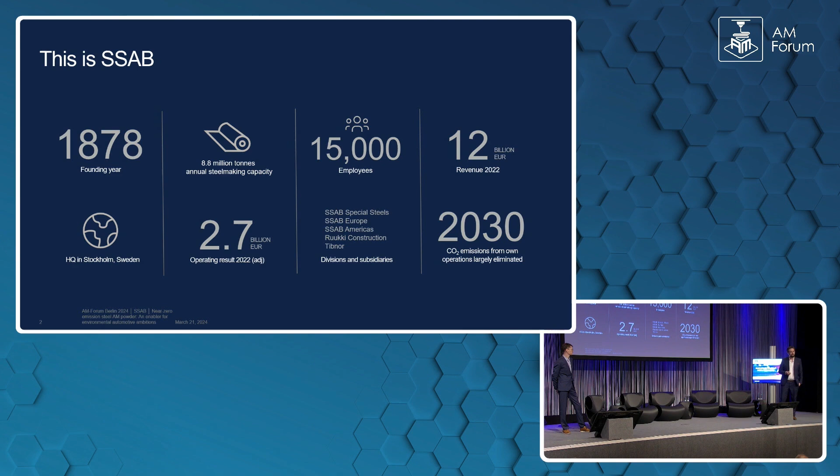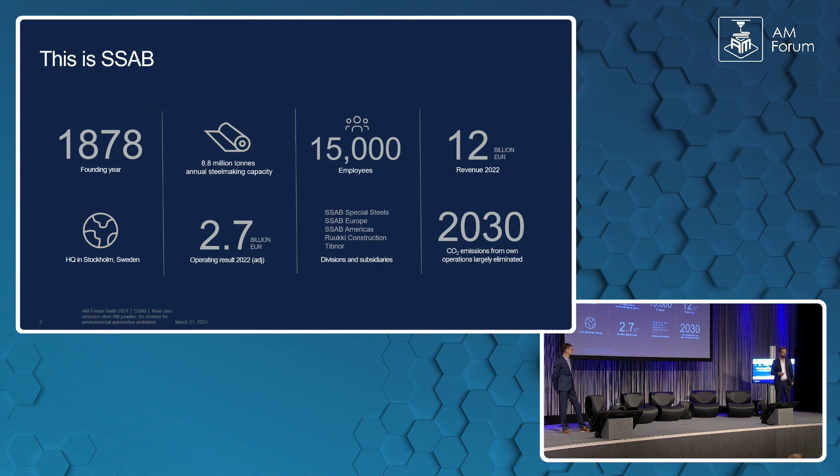SSAB, we're quite new in the powder business, so I just want to introduce us as a company. You can read the numbers, but what's important for us, Swedish company, HQ in Stockholm, Sweden, and we're aiming to be largely emission-free by 2030. Quite aggressive, I would say, and so far looking good.

That is, of course, with our products as well. That's why we have fossil-free steel and zero steel. The fossil-free steel is made from hydrogen-reduced iron ore, emitting only water, and the zero steel is made from scrap. The electricity is fossil-free, and the fuels are fossil-free.

Moving forward, this is our story in sustainability with steelmaking. In 2016, more or less, we started our venture together with LKAB and Vattenfall in Sweden. We started a new company called Hybrit, where we developed a new technology for reducing the iron ore. We announced that we were going to launch our fossil-free steel in 2026, but we did our first delivery in 2021, and in 2023, last year, we released our zero steel as well, which is emission-free scope 1 and 2.

This year, now, we're launching SSAB Zero and fossil-free for additive manufacturing, where the zero is scope 1, 2, 3, and the fossil-free 1, 2, which is quite important for our business. I will tell you a little bit about that later. And as I said previously, 2030, largely emission-free. Striving, going well.

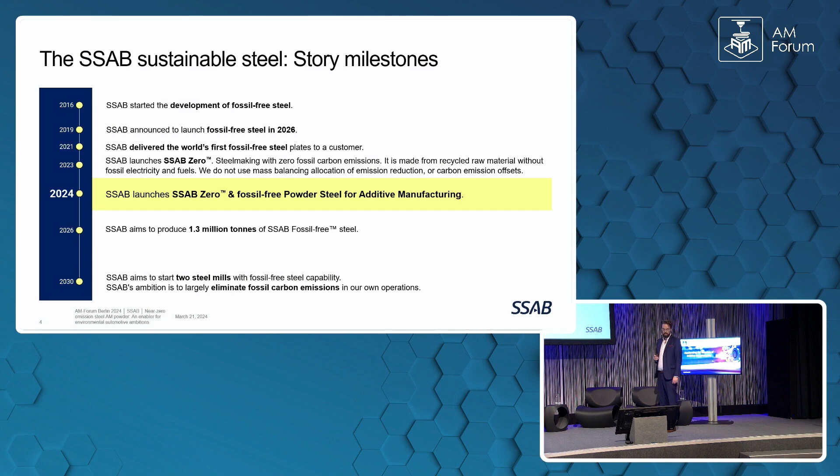Why do we do this Hybrit venture? We do this because we know recycling steel, scrap-based steel making will not be enough. We will not be able to meet the market demands. So we need to have this, and we're pushing the market. Why are we pushing the market? We're doing it because of the environment and the great peers we have within the industry, like Volvo, who's pushing us, of course. And that's why we have a great collaboration in this area.

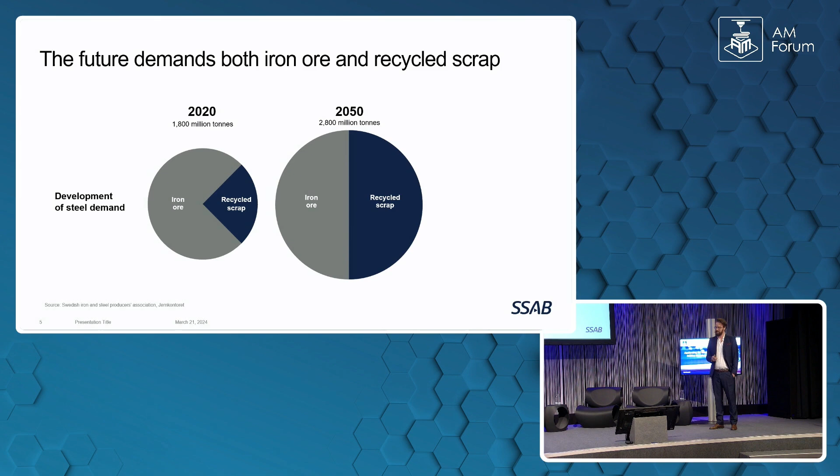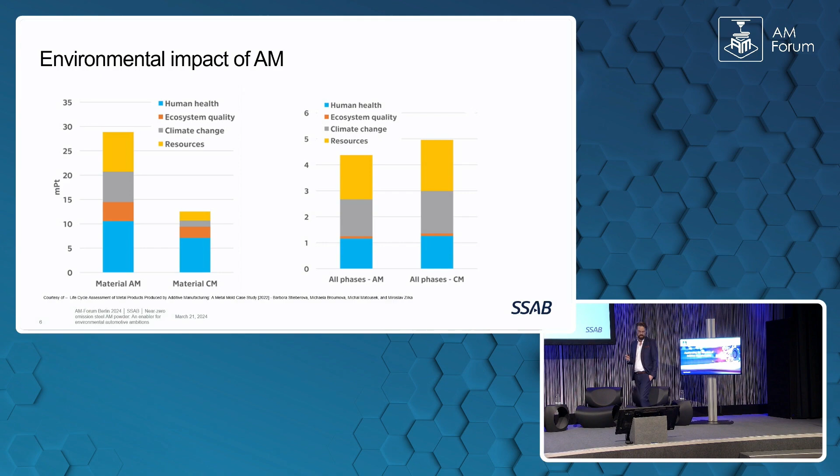And now I will leave it to Frederic. Yep, thank you.

Yes, and as you might know, at Volvo Cars, sustainability is very high on the agenda. Already in 2019, our CEO said that we should build our reputation in terms of sustainability, as we have done on safety. So it shows pretty much the level here. So we have developed or released our new ambition when it comes to sustainability, and we aim now at being pioneers to protect people and the planet. This is by focusing on these three sustainability pillars that we have.

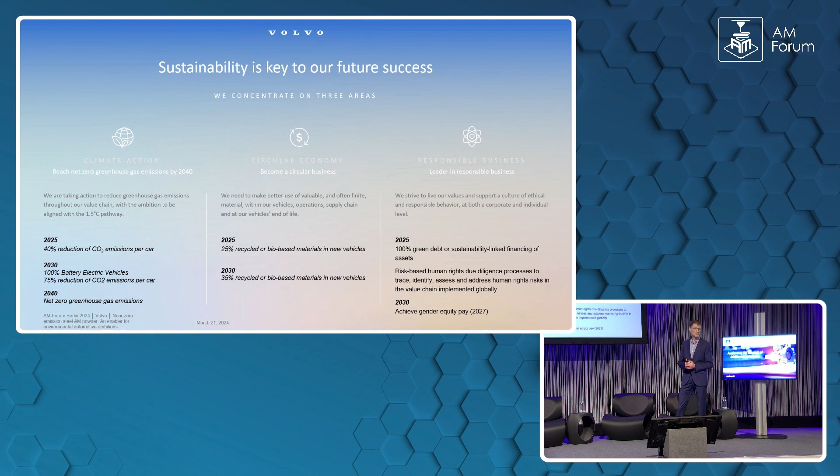Climate action, and here we plan to be net zero by 2040. Circular economy, and we will work towards being a circular business. And also, finally, by 2040, being recognized as a clear leader when it comes to circular business, responsible business.

Focusing. Which do I have to? No? Okay. Yes, that's much better. Yeah.

Focusing on the climate action, because this is a very important topic here. Compared to 2018, we are planning to decrease the emission by 40% on our cars by 2025, decrease them by 75% by 2030. This is very ambitious. And also being, as I said before, net zero by 2040. And already in 2030, we will only produce 100% battery electric vehicles.

Now it's, what did I do? Shows something else on the screen here. It's on this. Oh, yes, bingo.

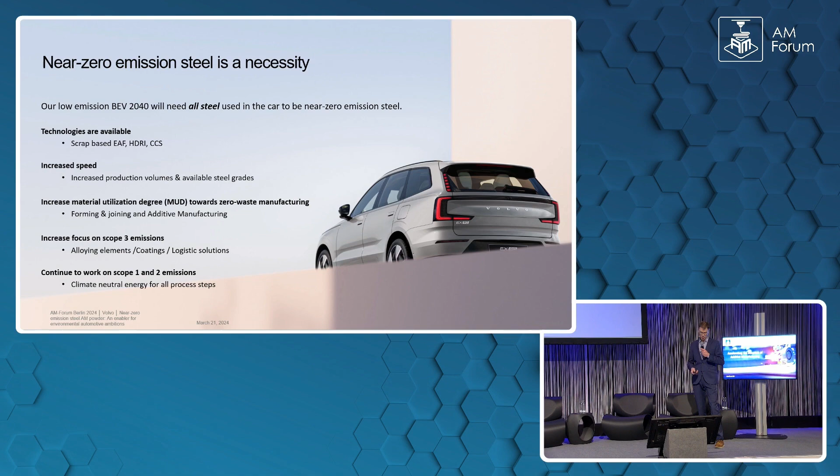Yes, it doesn't go that way, this one. Yes, now it's perhaps back. It's inverted.

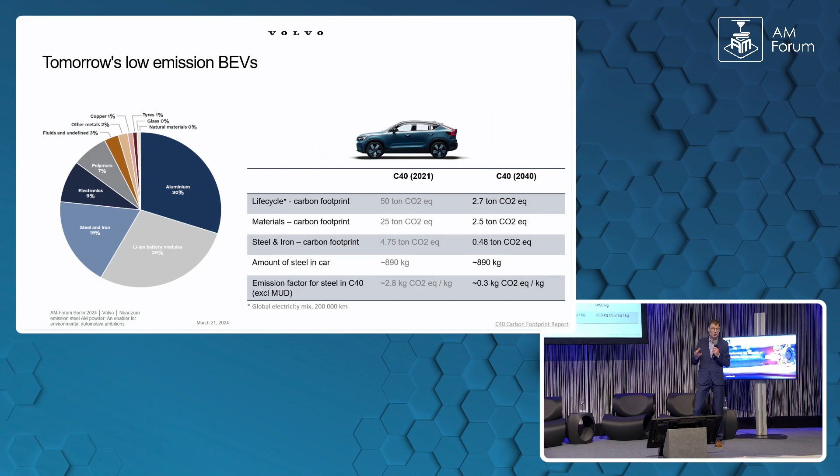Thanks. Yeah, if we look at additive manufacturing in more detail and how it can improve or enable our ambitions when it comes to sustainability. If we go to this one, yes, thanks. Here we have looked at the different aspects during the car life cycle that we think we, or of course our suppliers, should address. I guess you recognize them, we have seen them this morning also.

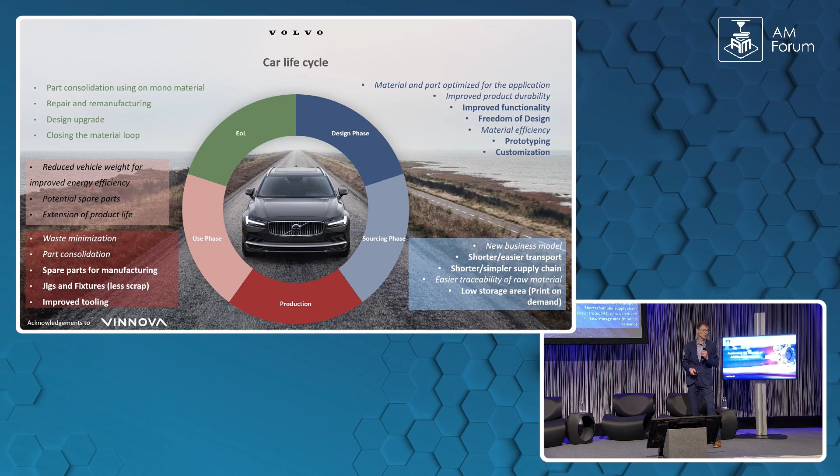We are very active in the design phase, sourcing phase and the production. For example, for the design phase, we have been working with additive since the 80s when it comes to prototyping. We also see advantages like improved functionalities. On the supply chain, a shorter supply chain makes it a lot easier to trace the materials and also decreases the transportation burden. And when it comes to production, we are more onto the tooling, the jigs, and also the spare parts for our equipment. There we definitely see big advantages.

So to sum up, decarbonization is definitely vital for us and our ambitions, working on both internal processes, the alloying elements, and other contributors that we have addressed. When it comes to the scrap, we also think that reusing the scrap from automotive back into automotive is very important, to secure that we will not downgrade the scrap and keep it at a very high quality as long as possible.

And here it is also very coupled to your product SSAB Zero. And also traceability of the alloying elements, the ore, and also the scrap. This is very much to secure responsible sourcing, which is of course very important for us. Yeah. How about you? Yeah, I don't need that one.

And steel supply. As I mentioned before, the scrap availability won't be enough for the future demand we have in the steel world. And we have developed new products to be climate neutral without offsetting or mass balancing. And the great cooperation we have with Volvo and others is pushing our development in sustainable steelmaking. We're really grateful for that. Thank you.

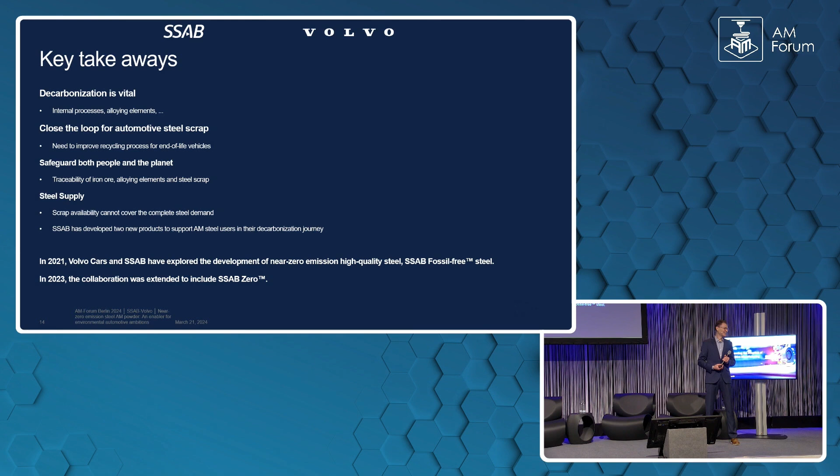Thank you so much, both of you. If I get the chance, Frederic, to have someone from an automotive company on stage, I need to ask one or two questions. Yesterday we discussed shortly that the end customer is not really interested in what kind of technology you use inside the car. Most of the time it's covered anyway, so nobody would see. But especially when it comes to sustainability, which is one of the core topics of Volvo recently, is that something that is marketed as well? Would the customer be interested in that?

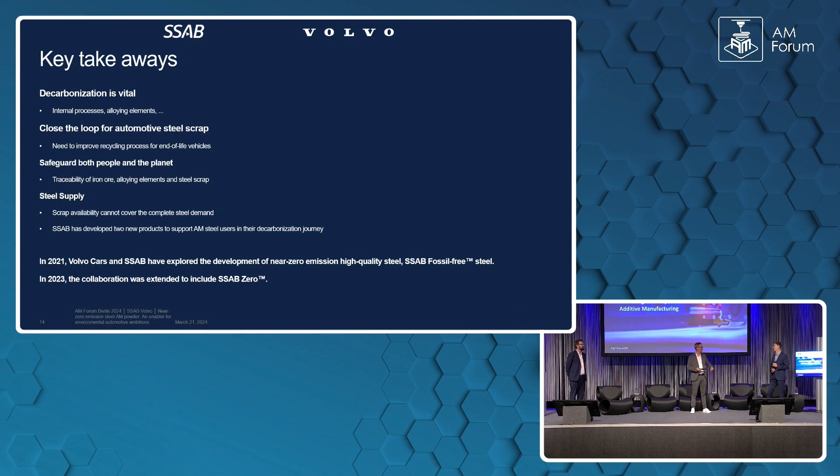In sustainability? Not in sustainability in total, but using zero emission metal powder and using additive would be a good story, wouldn't it? Yeah, I guess it would be a good story. Is it something where marketing approaches you and says, Frederic, please tell us more about what you're doing there? I actually don't. No? Okay, it's not something where you're connected. But this would be my recommendation, to be honest, to bring together marketing, because this should be marketed. This is something the end customer should know, right? That a company is doing that.